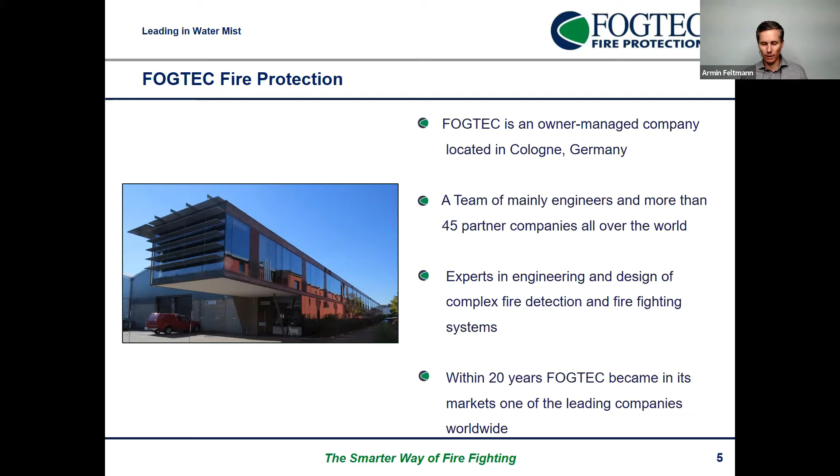What are we doing? Big parts of our business are consulting, development of protection concepts, fire testing. Smoke and fire testing is a big component to show that the systems are working or how they're performing with different fire loads. Engineering, component supply, firefighting and detection systems we are supplying. But we are also doing installation works ourselves. I guess Omri has mentioned the Suez tunnels already. There we are responsible for the turnkey supply of the system. So project management, part of it, service, maintenance, and operations. So a very broad variety of supplies, which also gives us the inside view of how the projects then really work.

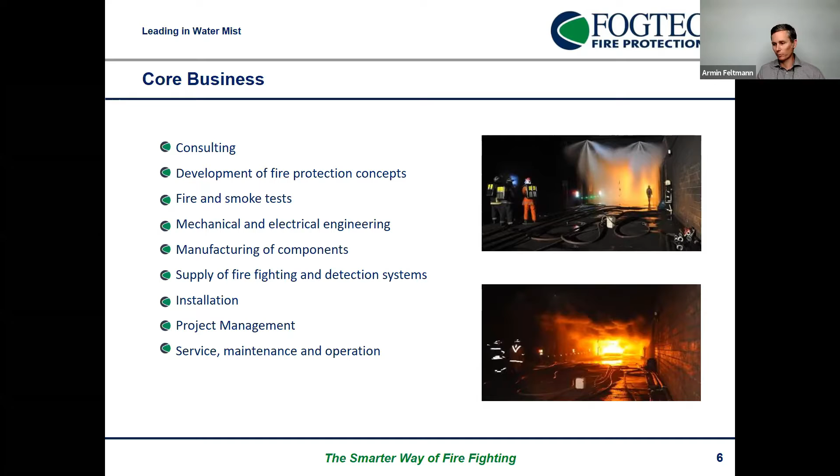Just a quick look to the businesses we are in. The so-called fixed business is the units where we work with buildings and then industrial applications. Railway systems, we have water mist systems on board in the train, dedicated detection systems, overall controls of the system, allowing to compensate other safety deficits in a train or allow the train manufacturer to build the train in a different way to save weight, save costs by using a water mist system. And then tunnel systems, the reason why we are speaking here today, why you are listening, is the third pillar or main pillar of the company.

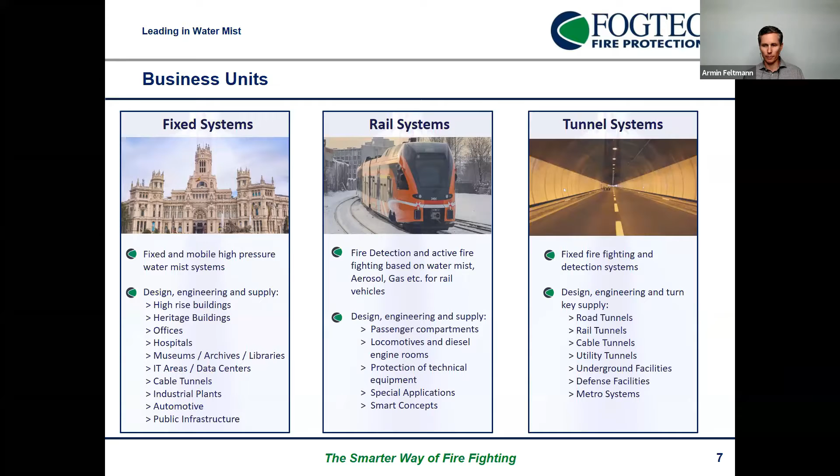We are quite active in all kinds of memberships and networking associations. For example, NFPA 502, we are sitting in a technical committee. Myself, I'm sitting in a technical committee since a few months.

We have done lots of research projects to find out how the systems are working, how are they interacting with the ventilation system, what are the temperatures in the tunnel, can people still see when the system is activated, and all these kind of questions we are finding out in these research projects. So this eats also quite some time for the company, but gives us a major benefit to understand what's really happening.

Lots of fire testing, as I said, probably you might know some of the clients, Eurotunnel, Tunnel Mont Blanc. We have carried out full-scale fire tests, as you can see in the pictures, with fire loads of up to 200 megawatts. More than 200 fire tests have been carried out. So we have a very profound understanding of what's going on in these critical situations in tunnels.

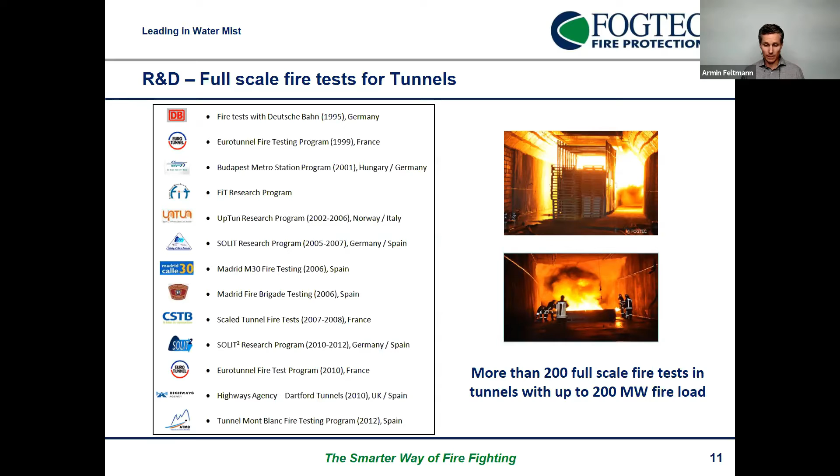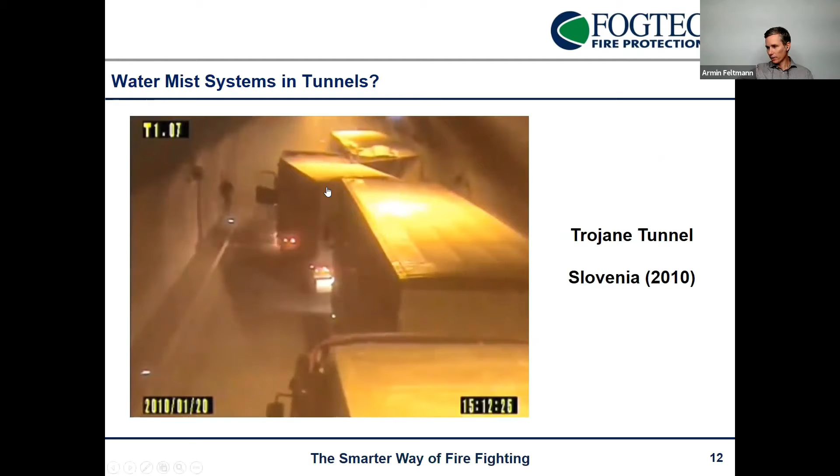A small video showing a crash in a tunnel in Slovenia. Please pay attention to the time at the lower right of the video. It will skip a bit. You see that the driver is running into the wrong direction. The smoke is being pushed downwards the tunnel. The detection system now hits in, so very fast detection of the fire.

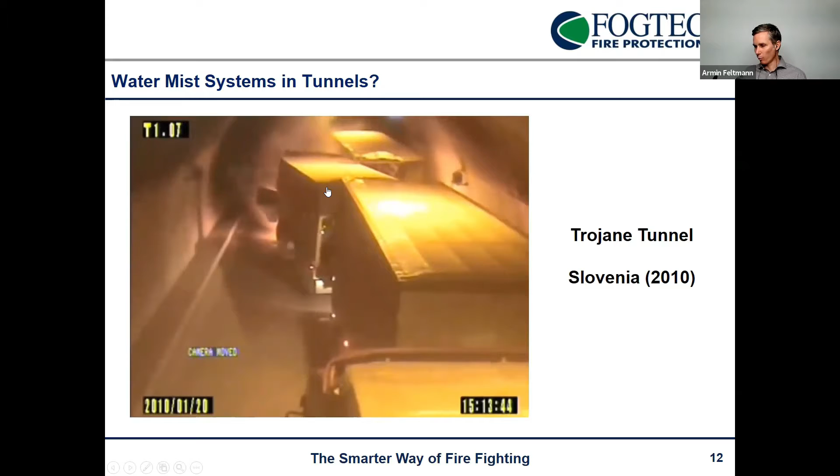Very quickly you can see that the tunnel is completely filled with smoke. Not even 2 minutes have elapsed. The fire is spreading from one vehicle to the other. And you will soon see at the other side of the tunnel the massive amount of smoke which is coming up. We are now approximately 3 minutes after the crash has happened. And the fire has already evolved extremely strong, although it's not even a liquid fire.

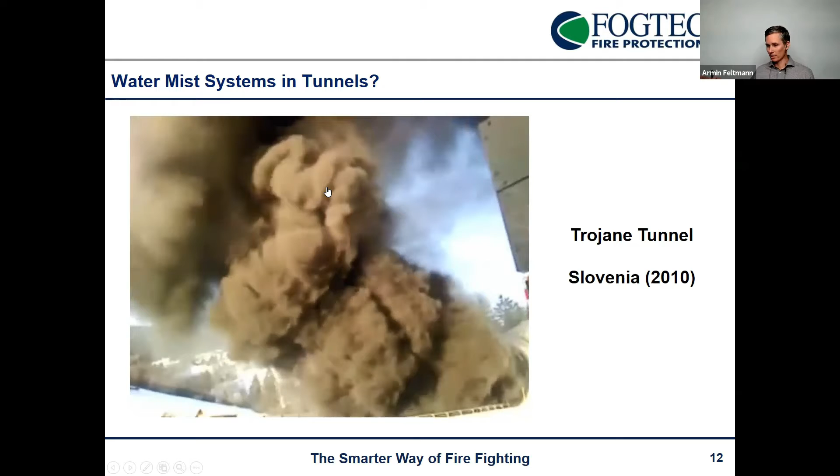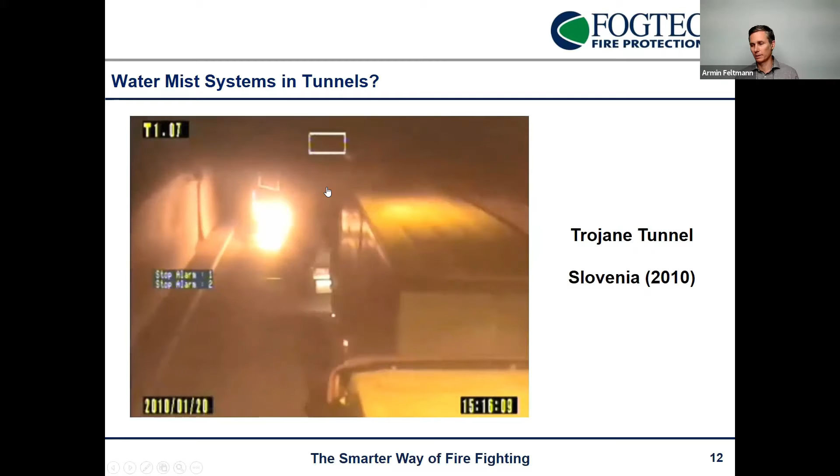Now, this is the amount of smoke. Imagine no firefighter would be able to go in from this side. Very critical situation. And these are the kind of accidents or reasons why you put water mist systems into a tunnel. You see now the cross-section is filled with smoke. Very, very difficult situation.

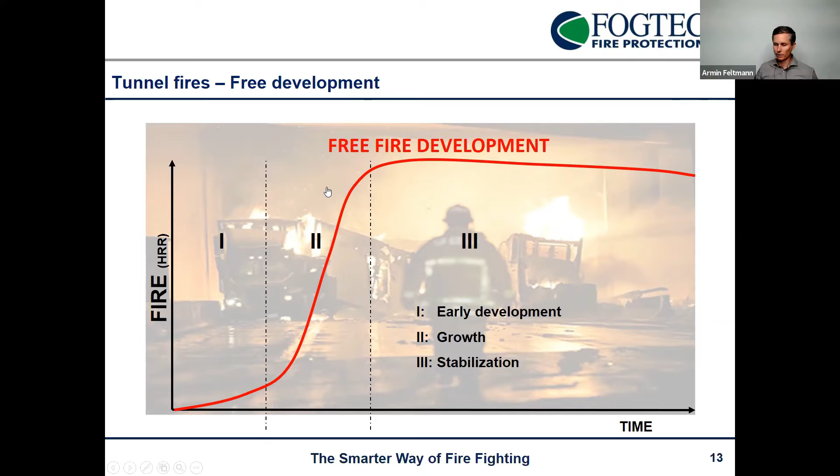So a bit of the theory to understand what's going on in these moments. You see a typical fire curve of a tunnel fire development. This is what different fire curves in the world look like. The one is a bit more steep, the other is a bit longer, but this is kind of the typical scenario that we are having. So a relatively slow first development of the fire, then in phase 2, a very strong growth, and then typically the fire will stay at a very high level in the tunnel, which then also leads to problems for the tunnel structure.

What we do with the water mist system is we are trying to cut this curve. We activate as soon as possible. As soon as the fire has been detected, the water mist system will be activated, and we are bringing down this fire curve to a low level. So the consequences of this fire will not be as massive as you have seen in the video, but the fire curve will come down with several benefits for all parties involved in these scenarios.

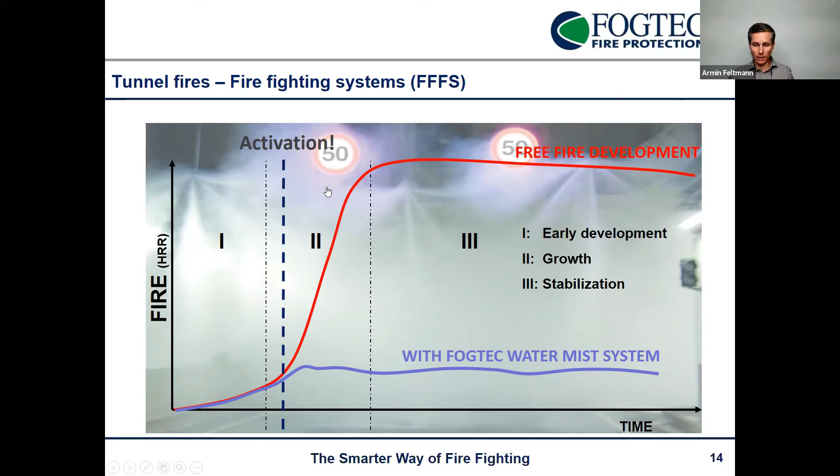So what does this actually mean? Sure, we will improve the life safety, the temperatures will go down, we will limit the amount of smoke. The firefighters will also be able to go into the tunnel to really fight the fire, to access the fire. And bringing down the temperature also means that we will protect the structure of the tunnel. So these are kind of the direct benefits which are relatively obvious for such an active firefighting system.

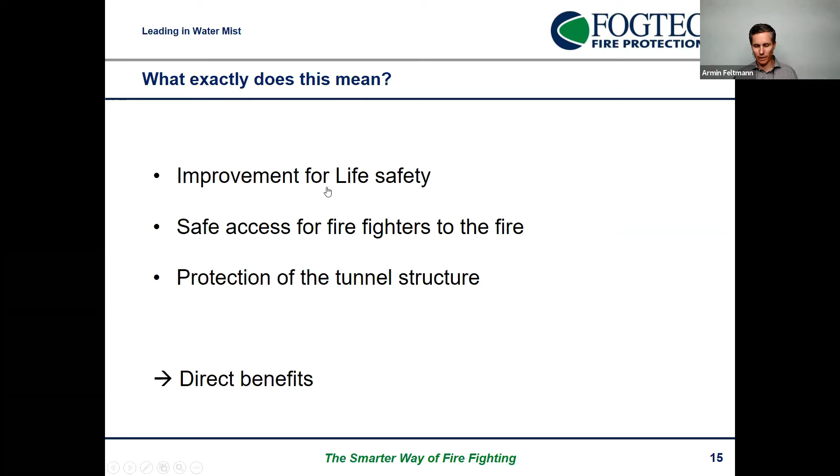But there are also measures which have kind of secondary effects, which then also allow a holistic view, an integrated view to tunnel safety, including water mist systems. So we can actually reduce or improve the performance of the ventilation system. The water mist system reduces the amount of smoke, which means that the ventilation system has to drag away less smoke than compared to with no water mist system.

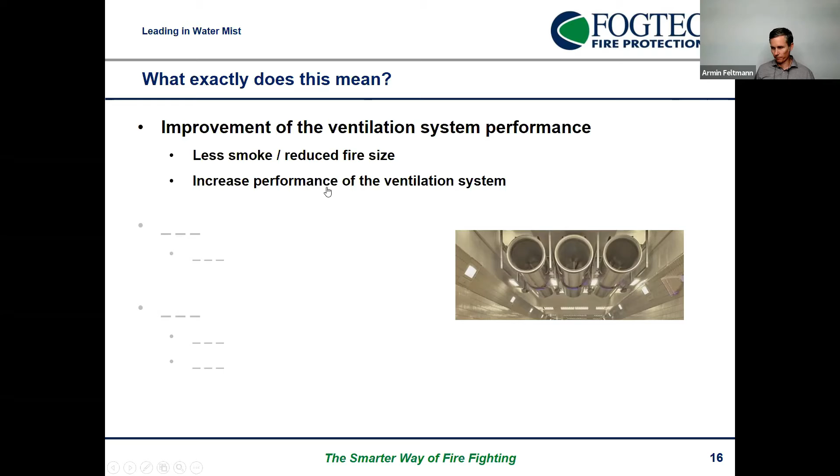So in many cases or many tunnels here in Europe, we have lots of old tunnels which do not really meet the requirements of modern design fires. So they were designed 30, 40, 50 years ago. Different fire loads were considered.

So we have seen that in many cases, the ventilation system was not able to push out the smoke efficiently outside the tunnel. We have seen in fire tests that back layering has occurred, which means that the smoke actually comes back against the ventilation direction, which is very critical because you want to keep this side of the tunnel clear of smoke for the people, for the life safety.

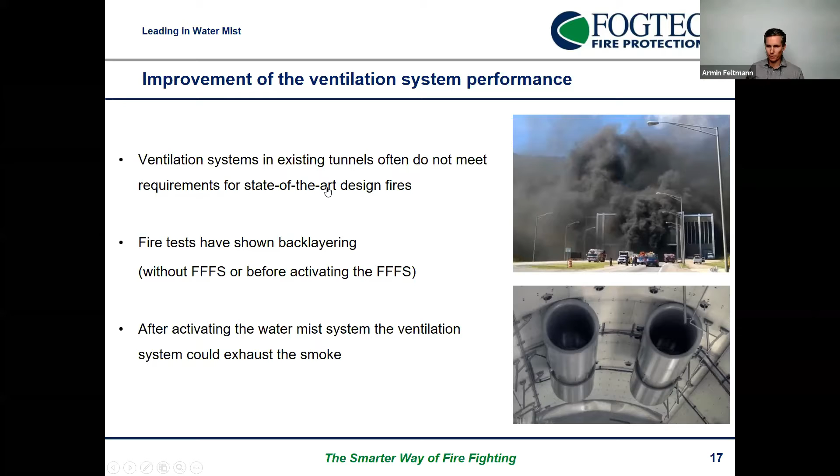And when doing the fire tests, we have seen that even in late activation, the water mist system has brought down the fire size, the amount of smoke, and the ventilation systems were able to push out the smoke of the tunnel. So let's assume we're having a fire size of 100 megawatt in the tunnel. We will activate the water mist system, push it down to maybe 25, 30, 35, doesn't matter.

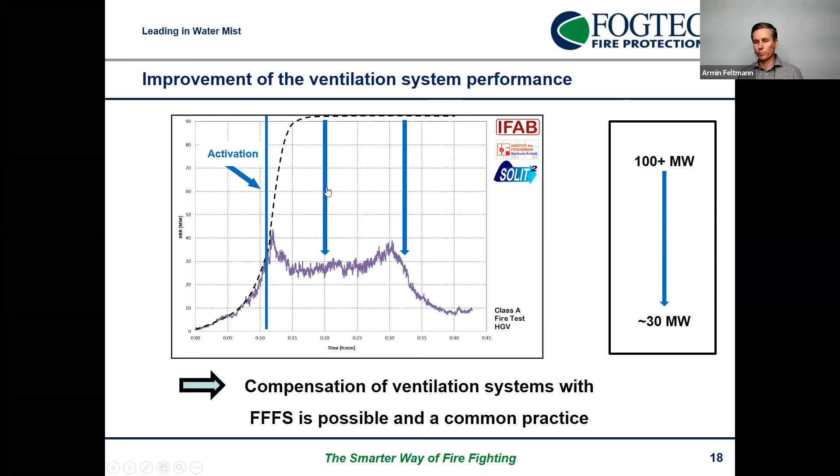Reduce the amount of megawatts in the tunnel, reduce the amount of smoke, and then even having a kind of 100 megawatt fire load burning in the tunnel, a ventilation system which is maybe designed for 30 megawatt only, as we have for many systems, the ventilation system can, in combination with the water mist system, still push the smoke out of the tunnel without any back layering. So putting a water mist system into the tunnel may improve the performance of your ventilation system for even severe fires.

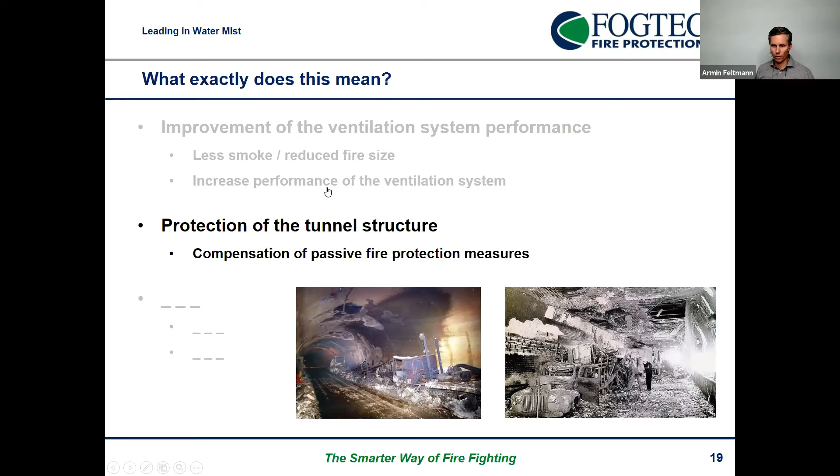The protection of the tunnel structure. This is a very important factor for putting water mist systems into tunnels. These pictures show severe tunnel fires from the past, and show that when the structure is exposed to high temperatures for a very long period, the concrete might spall, it might crack, it falls down. For example, on the left-hand side, this is what you see in the Mont Blanc tunnel, which has led to the drastic consequences and fatalities which we had.

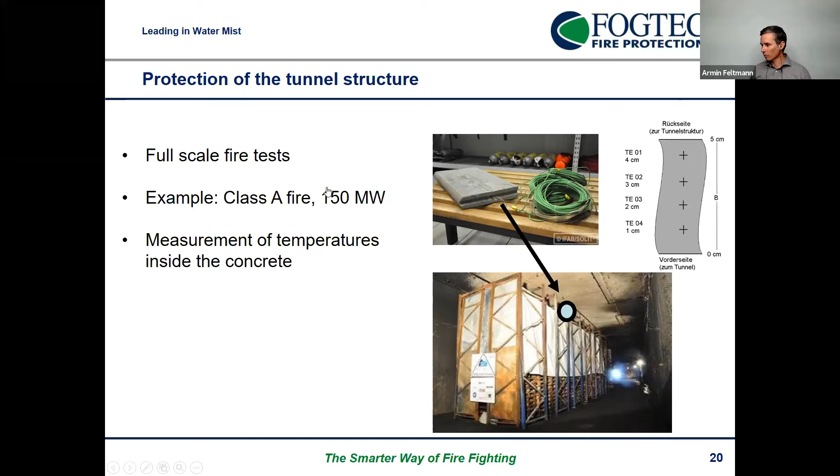So 150 megawatt fire load, a sensor every centimeter in depth. And then we could see that the water mist system has limited the temperatures after activation to maximum temperatures of around 250 degrees inside the concrete. So the critical values for the spalling have not been reached. We are far below the critical values. The system was able to protect the tunnel structure efficiently, which also means that you are able to compensate potentially missing passive fire protection measures or tunnel structure protection measures with a water mist system.

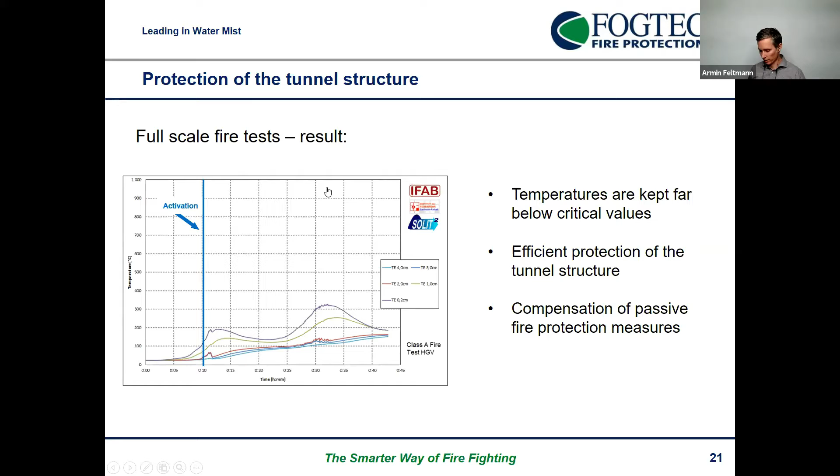One very important reason for a water mist system in the tunnel is to keep your tunnel up and running, even though you have a severe truck fire inside the tunnel. So we want to avoid these kinds of congestions. We want to avoid that our infrastructure has to close down for several months or even several years. And we would also be able to refurbish a tunnel relatively easily and upgrade the tunnel with a water mist system.

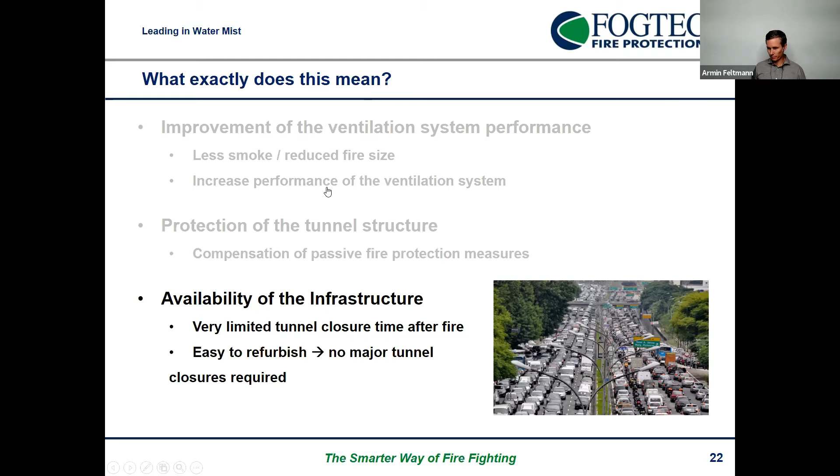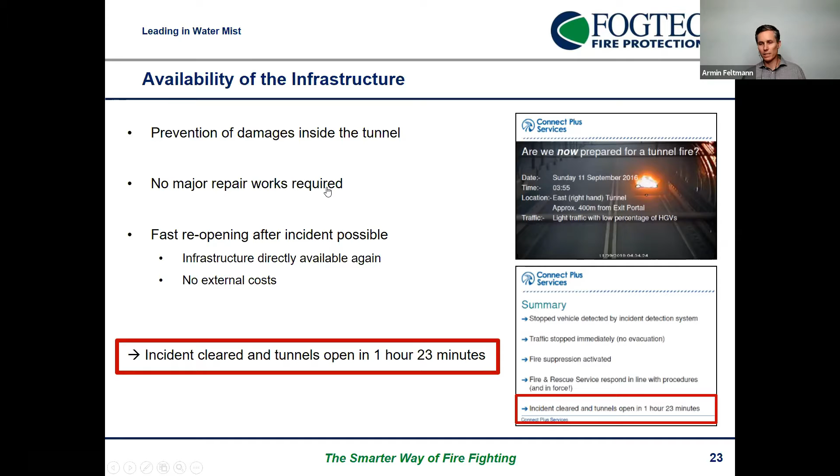So maybe one example: there was a fire in one of our tunnels in London. A car was burning. There were some repairs going on. The system was activated relatively quickly. The temperatures were cooled down, and we could see that there was actually no damage inside the tunnel, which means that the tunnel was open again after 1 hour 23 minutes, so roughly 1.5 hours, and the tunnel was opened again for traffic very soon after this incident. And this is one of the major benefits that such a system will also provide.

The Mont Blanc tunnel, I don't want to go into details, but just as a very severe example of consequences of fires in tunnels. Obviously, we know that 39 people were killed, but I want to point out that the tunnel was also closed for 3 years because of the refurbishment requirements, the upgrade requirements after the incident, and the very high external costs for society.

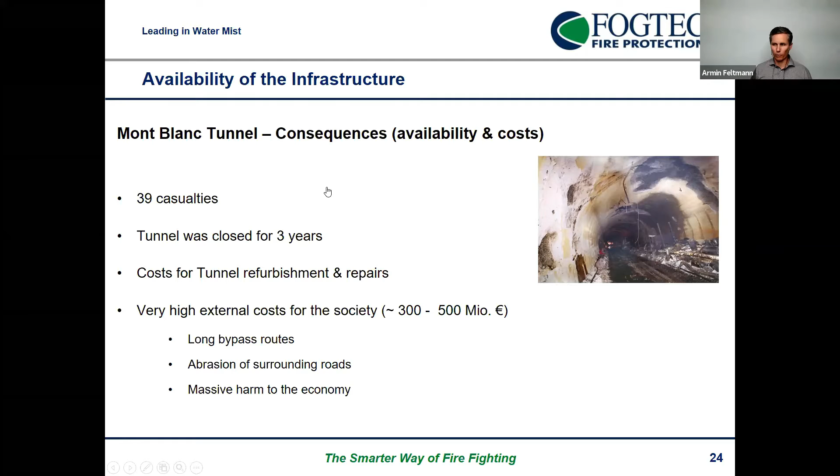I'm not speaking of the direct repair costs of this tunnel, but all the consequences which society might have when passing by different routes, abrasion of the surrounding roads, which have to be refurbished later on. So a massive harm to the economy and society from such a tunnel closure. And this for sure would have been possible to avoid with an active fire suppression system in the tunnel.

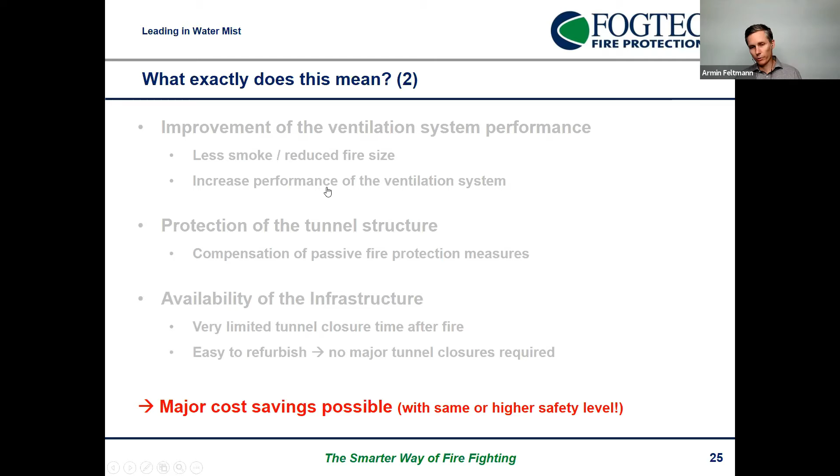Now, this obviously allows you to not only spend additional money on a system, which all of us want to avoid, but we want to be clever and integrate such a system into the overall safety concept of the tunnel. Meaning that maybe we don't need big jet fans if we have a water mist system. The fire brigade might allow for 15 or 20 minutes more time to enter the tunnel, because the water mist system will keep the fire under control. And all these reasons jointly will allow you to even save costs putting such a system into a tunnel.

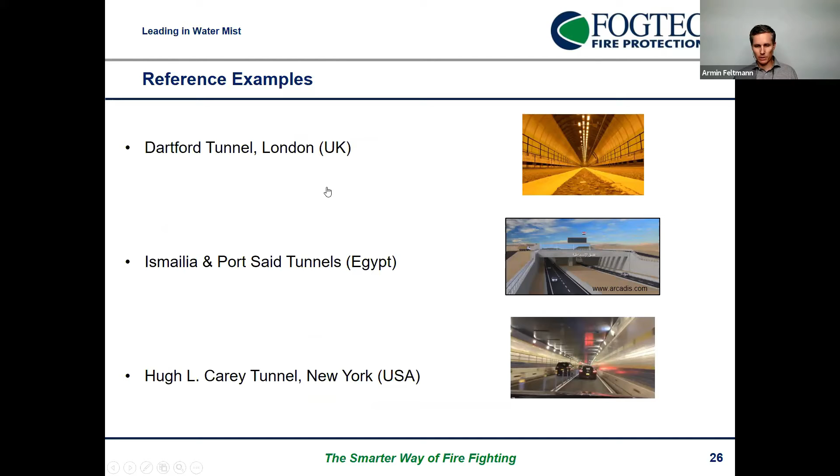A few reference examples to just show how these systems are being implemented, how they work. The Dartford tunnel in London, I just mentioned already the fire we had a few years back. This is how it looks, very old tunnel. It's a tunnel with concrete and cast iron linings, so very sensitive to temperatures. It's going below the River Thames in London, so also a critical piece of infrastructure.

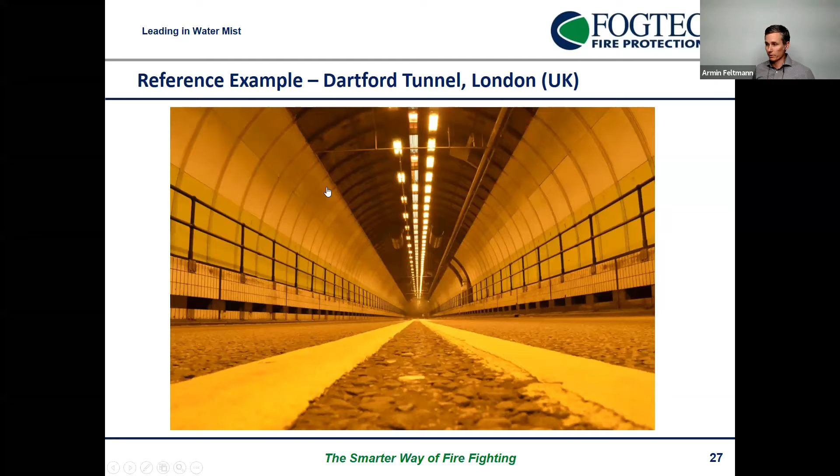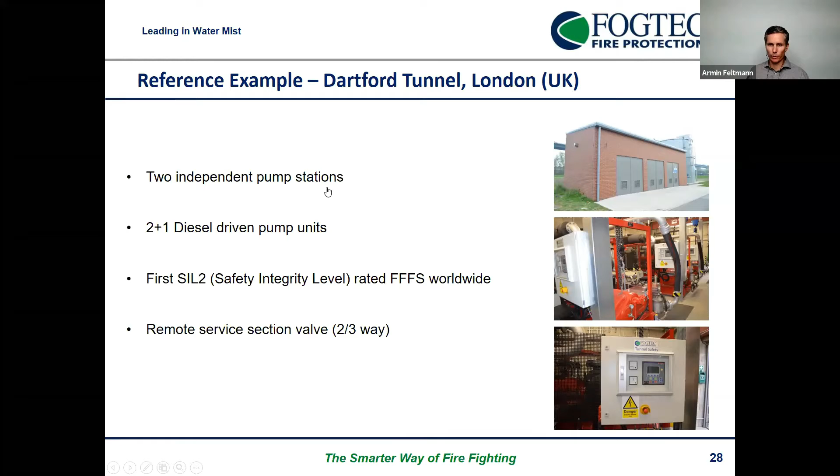We have 2 pump stations here, diesel-driven pumps, so a very reliable system. A SIL2 rated control system, which is a very highly sophisticated control system to keep the system up and running at basically any time. And a section valve which allows for easy maintenance without closing the tunnel. Everything was done in 3D. We had very short installation times, a very high level of prefabrication to minimize the time inside the tunnel, and installation within the budget and time frame.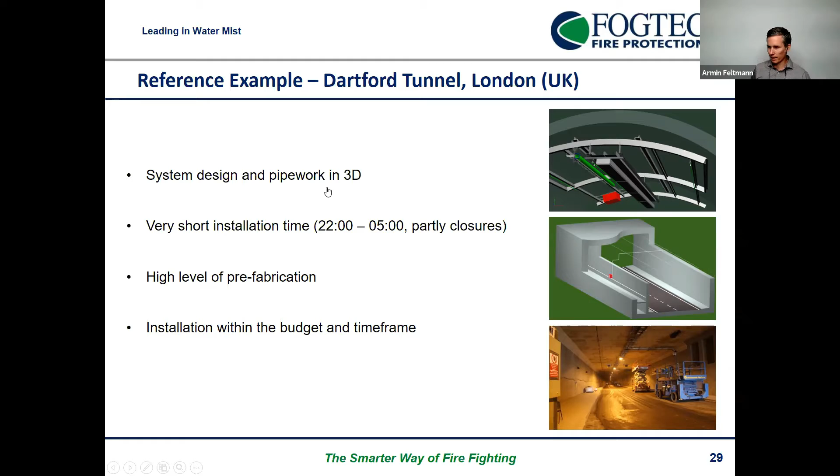I said already the cast iron lining was a very sensitive part of this project. The European law required to upgrade the safety systems of the tunnels, ventilation, structure protection, life safety issues. So these were the main reasons why the water mist system was chosen. It was not possible to upgrade passive protection measures. They could not close the tunnel for several weeks. And you have to check the tunnel, especially when being below the river, for possible leakages.

Very high availability requirements. And as this is a kind of privately run tunnel, each and every car pays toll to go through the tunnel. The business continuity of such an infrastructure is obviously of crucial importance.

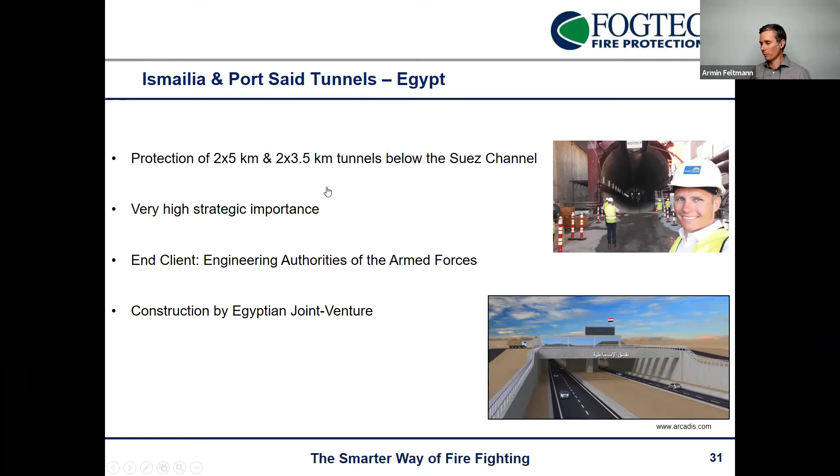We are about to finish the works in Egypt in 2 tunnels, very exciting projects, very special projects also for us. We are protecting the Ismailia and Port Said tunnels in Egypt, which go below the Suez Canal, one 5 kilometers long, and the other one 3.5 kilometers long, of very high strategic importance for the Egyptian government. Engineering authorities of the armed forces are the end client, and the construction is done by an Egyptian joint venture of 2 construction companies. So you can see me here during the early construction phase when we were bidding for the project.

Oops, that was the wrong direction.

So again, we had to provide a fire-tested system. We had to prove that the technology was working. The traffic in Egypt is a bit different than what we are used to. Cars are probably catching fire a bit easily, trucks not in a very good maintenance status. It's an underwater tunnel, so critical infrastructure. It was designed to fight a fire of 200 megawatts, so a really severe fire load. And all this was done in cooperation with international consultants working on this project.

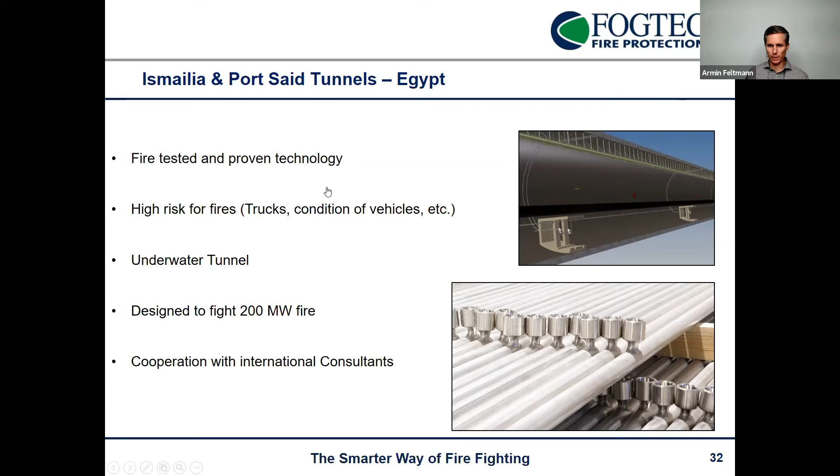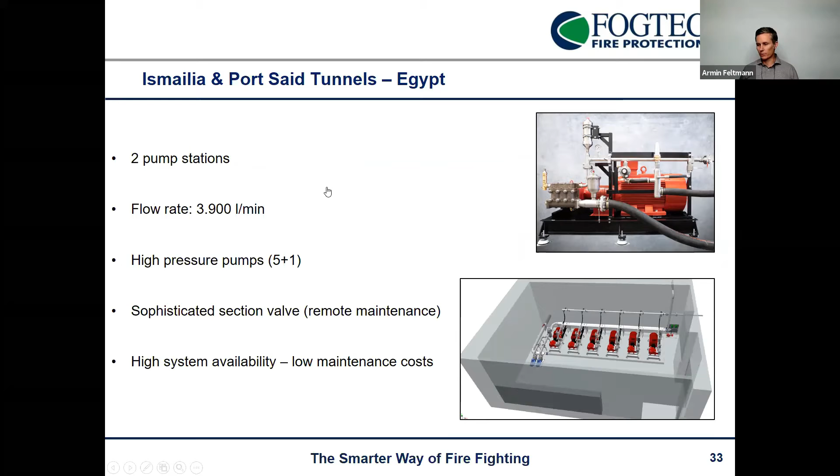Some technical details: 2 pump stations were installed. We have a total flow rate of around 3,900 liters a minute, 5 high pressure pumps, 1 redundant pump unit as a backup, a sophisticated section valve allowing remote maintenance without closing the tunnel, without extra costs, and a very high system availability, which then also leads to low maintenance costs for the client.

A few more pictures of the tunnel during the construction phase or installation phase. The installation was carried out by our local partner under FOGTEC's responsibility, so we were the main contractor, and we did this with a very high level of prefabrication to minimize the working time inside the tunnel.

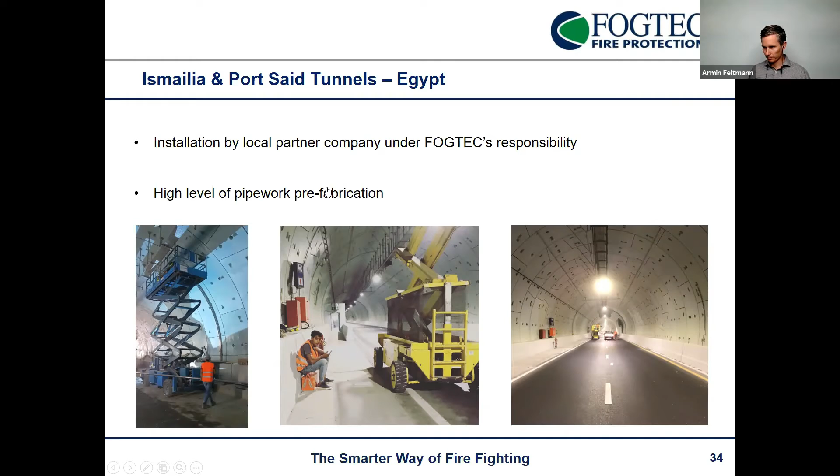One other project which we are currently finishing, also in these difficult COVID-19 times, still ongoing, is the Hugh Carey tunnel in New York, also known as the Brooklyn Battery Tunnel. Probably one or the other has heard of it, or has even driven through this tunnel. It's a very old tunnel from 1950, very narrow, very slim, little space, 2.8 kilometers long, 2 bores, connecting Brooklyn and Manhattan, so below the Hudson River.

The requirement was to upgrade the safety system and the ventilation system. You can imagine in 1950, the requirements were a bit different for tunnel safety systems. And the contractor had to do all this during full tunnel operation, so very challenging in such a busy city. You can see, by the way, a picture from 1954, I think, when the ventilation tests were carried out with running cars, so quite different times back then.

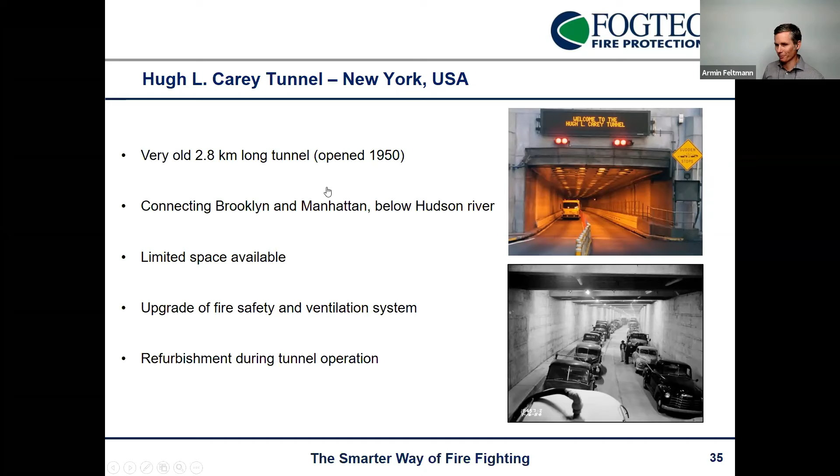We had to install the nozzles in this ventilation duct. You can see that there are some very slim ventilation openings, so a kind of old ventilation system. It was not allowed to install any of the components inside the road tunnel because there's no space. Everything had to go into the upper ventilation duct, as you can see. So we had to think of some clever pipework routing, space-saving installation, and protecting the tunnel with only 1 pump station, as space is also a critical factor in New York.

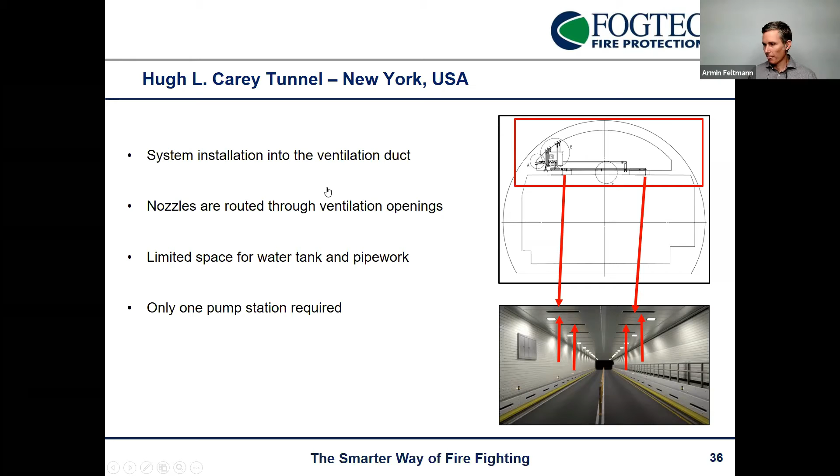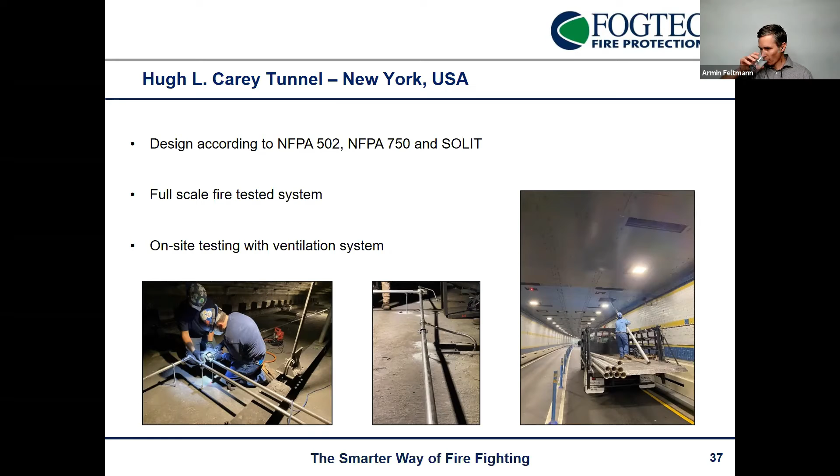Wait a few seconds because I can see that people are still voting. Yes, of course. We should take your time and think a bit what's possible here. Oh, whoa, a lot of people are voting. Good. Very good. So we get a representative result of the people's votes. Yeah, I think we can end the poll now. Okay.

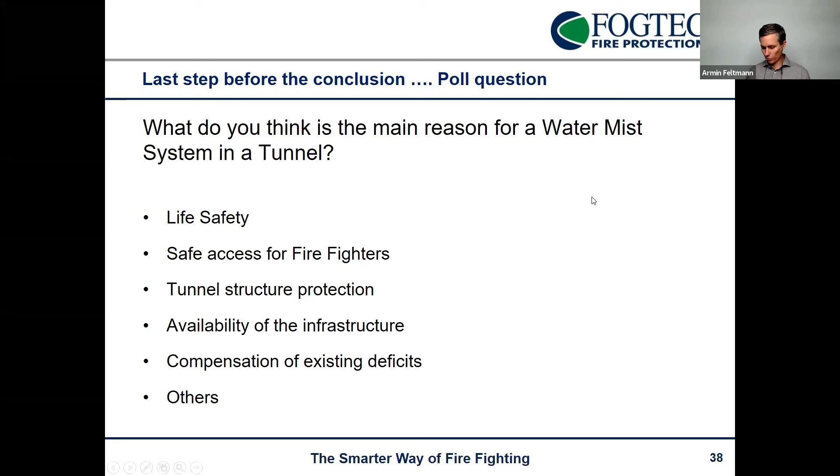Okay, so this leads me to my conclusion. I think we have seen and learned that water mist systems in tunnels provide major benefits: life safety, fire services access, increased structure protection measures, compensation of existing deficits, especially for upgrades. This is a reason, but also that we can actually save costs when implementing this into the overall safety concept of a tunnel. And we have also seen that the technology is actually accepted. It's now coming into more and more tunnels, especially critical tunnels. And it can also be very effective for tunnel refurbishments.